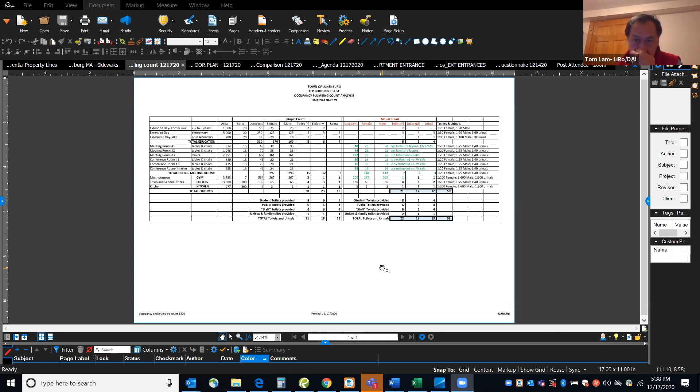So let me do the screen share. I just want to - we made adjustments. At the end of the meeting we emailed the spreadsheets to the committee. And then let me just explain how we came up with the plumbing count, and I'll make this quick. I mean, I'm just joking, not too many people are excited about this stuff.

So we started with a building code analysis, and then determined the number of occupants based on the building code. With that information, we separated into 3 areas: one is the extended day programs, another is the grouping of meeting rooms, conference rooms, and town offices, and the third category is the gym, which we call a multi-purpose space.

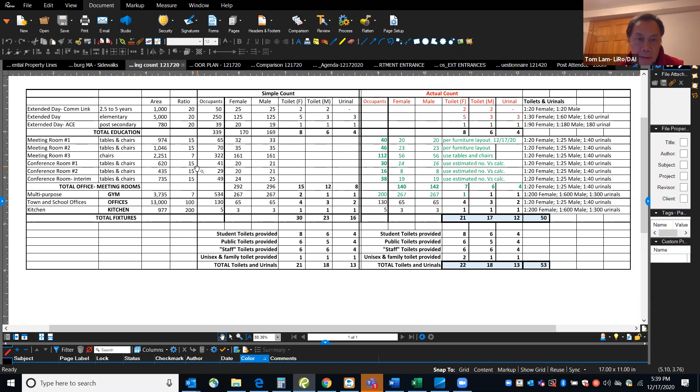Based on the information, this is just showing the process of how we came up with things by going through detailed numbers. With that analysis, different use groups have different occupancy loads. So based on the areas that we developed during schematic design, we calculated the number of occupants.

To make life simple at this time, we're saying it's 50% male, about 50% female. So under simple counts, we started with the number of occupants and subdivided into male and female. Based on the Massachusetts Plumbing Code, we figured out how many toilets and sinks are needed, which are the easy numbers. Toilets take more space, so our focus is really identifying how many male and female toilets and urinals there are.

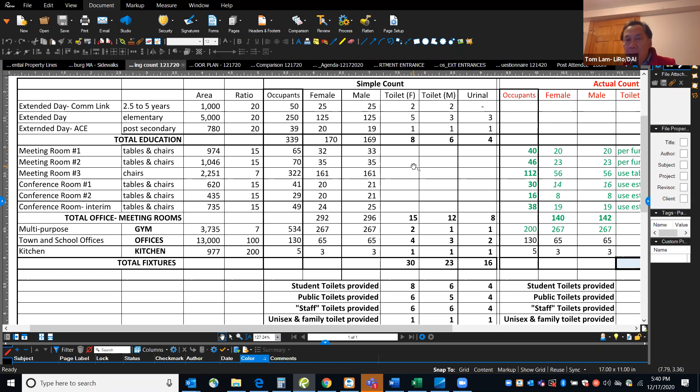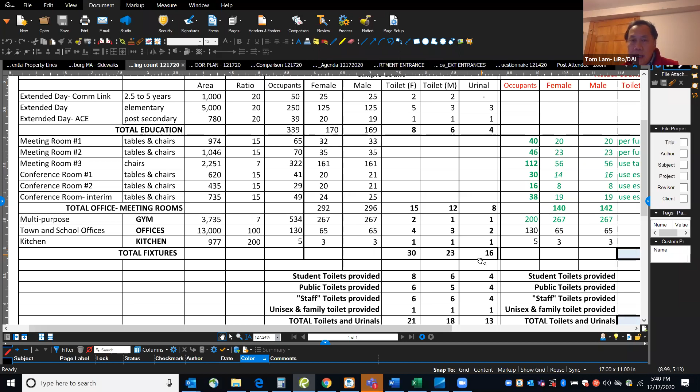So quickly coming down to the bottom, for the whole building for this project, we come up with: we need 30 toilets for females, 23 for male, and 16 urinals. This is based on a straight mathematical calculation of number of occupants from the code.

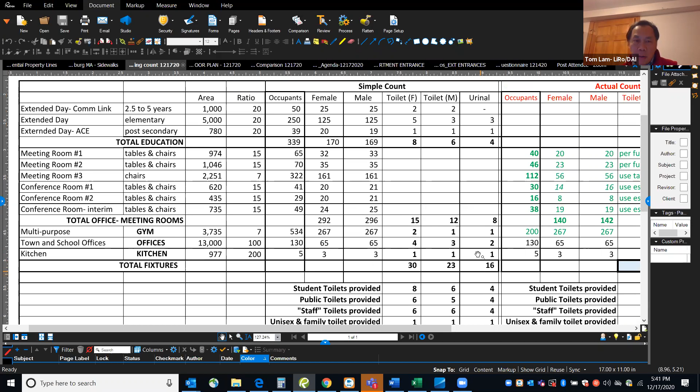If you look at the calculations for the meeting rooms, I can imagine fitting 65 or 70 people in the small meeting rooms, which is only about 1,000 square feet. But from the building code standpoint, this is what it tells us. For meeting room number 3, the larger conference room, we're using the worst case scenario, which is actually standing room only at 7 square feet per person. So it's going to be 322 people, which is really a lot.

So if we're just using that, we come up with a lot of toilets. Granted, I don't have any stocks in plumbing fixtures, it's just a little crazy. Based on what we showed in the floor plans during schematic design, we can come up with only about 21 female, 18 male, and 13 urinals. So this is not going to work.

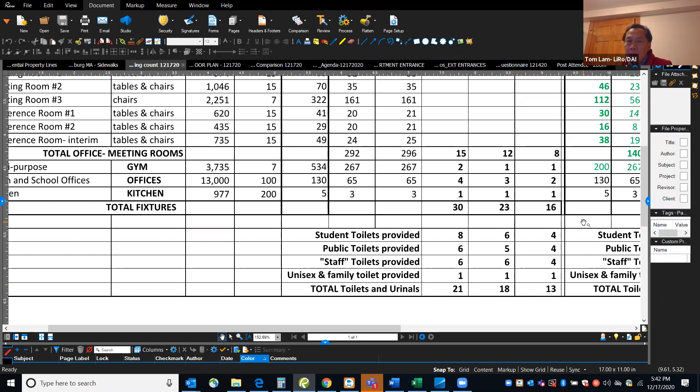So the next step that we do is a quick layout of the conference rooms and meeting rooms. We did some preliminary layouts and tried to fit as many chairs and tables as reasonable and practical. With that, we reduced the occupancy count, and as a result, we reduced the number of toilet fixtures. At this point, we are plus or minus 1 fixture for each count, so we can make that work.

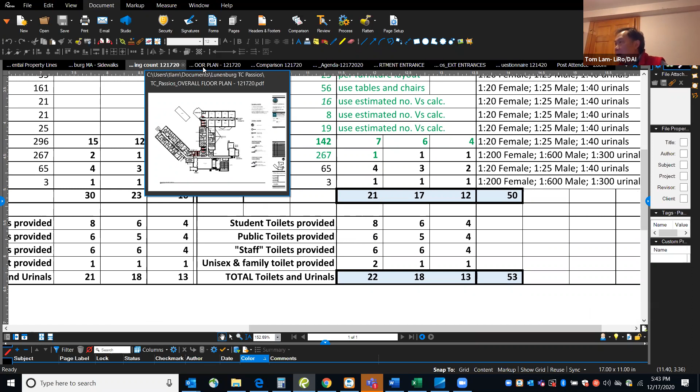So now I'm going to switch to the floor plan, unless you have any questions about this chart. This is more showing our thought process to come to where we are proposing as far as the number of fixtures. Why don't you keep going, Tom, and we'll do questions after you finish the section.

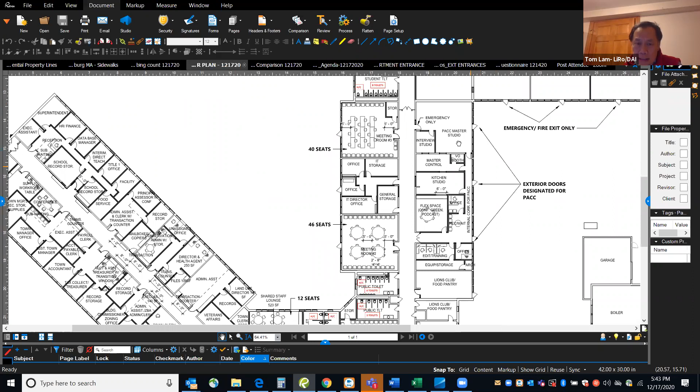So let's start from the front of the building. For the large meeting room number one, we did a quick layout with chairs, assuming there were discussions about a stage, but we need some sort of a front area. So we allocated 8 feet of clearance space, assuming there's some sort of a ledge or border between the platform or stage, whether permanent or portable, and we allow 5 feet between the first seat and the edge, and 5 feet in the back. We come up with about 112 seats with this layout, just jamming seats and chairs next to each other.

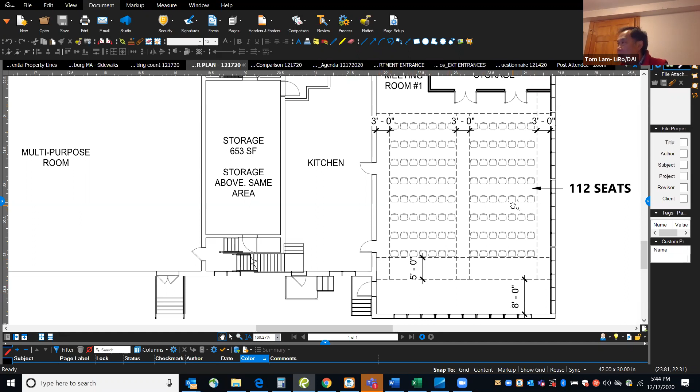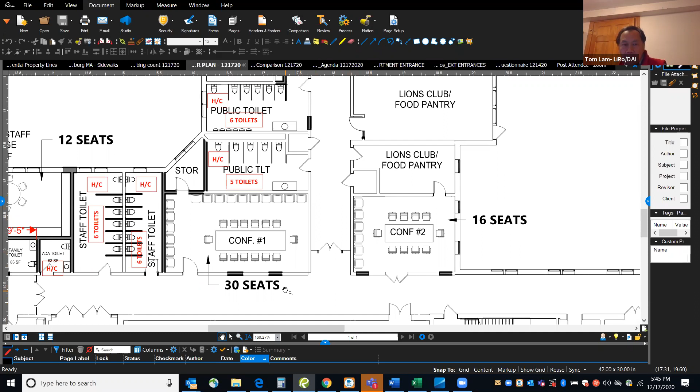Then the next set of layouts is the 2 smaller conference rooms. We thought it's a reasonable layout to have tables in the middle and fit as many chairs as comfortably possible. So we come up with 30 and 16 seats.

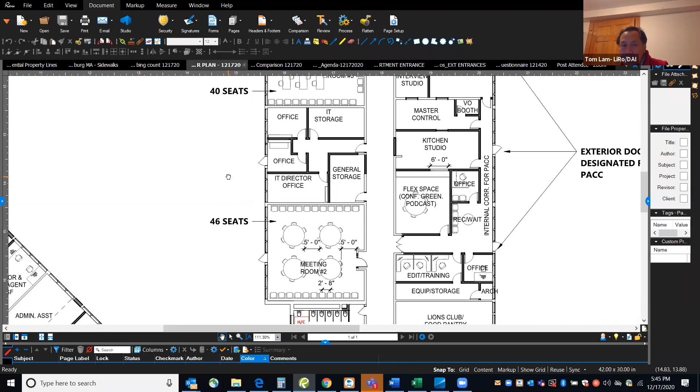Then for the 2 meeting rooms, we had 2 separate layouts. The first is, what if we have round tables? We can fit 4 round tables and chairs in the back on both side walls, and get to 46 seats. Another layout uses pretty standard 6 feet by 2.5 feet portable tables, with chairs on both ends, and we come up with about 40. We probably can increase the number of seating.

This is just to do some preliminary layout to see how many seats we can fit, and obviously we can use round tables here or change the configuration. Then the other conference room in the calculation is the town clerk or interim conference room. Again, we're using 1 long table with potential seats on 3 sides, so that's about 38 seats.

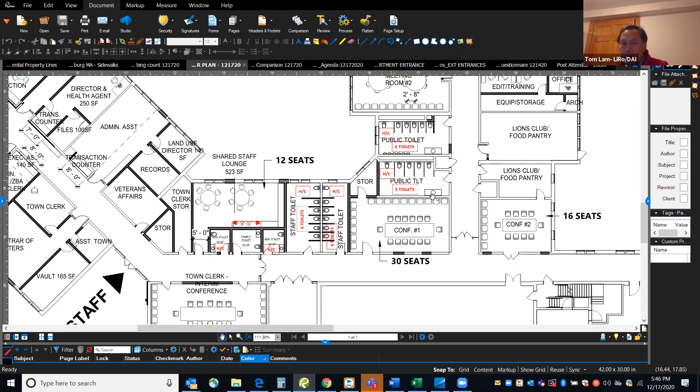With this arrangement, we are still using the same locations as what we have shown for the toilets. So in the past, we have shown 2 public toilets next to conference room, above conference room number 1.

And then there were also 2 toilets which we designated as staff toilets on the left-hand side of conference room number 1. So the new things that we did the last couple of days was we created a series of unisex toilets, including a family toilet. Obviously, we can put the family toilet closer to this side, but I just want to show that we have the several group toilets and then some individual unisex toilets.

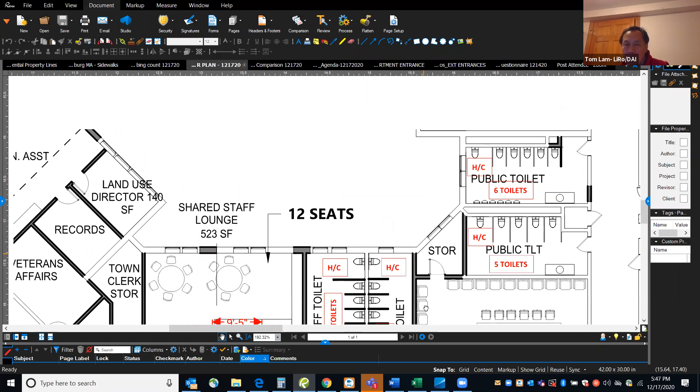These unisex toilets are handicap accessible, and in each of the group toilets, there's also a handicap accessible stall. The last toilet that we have is for the students. Again, we didn't show doors and stuff, we just want to do a quick layout. So we got to have 6 on one side and 8 on the other, and there was also an additional toilet in the ACE room.

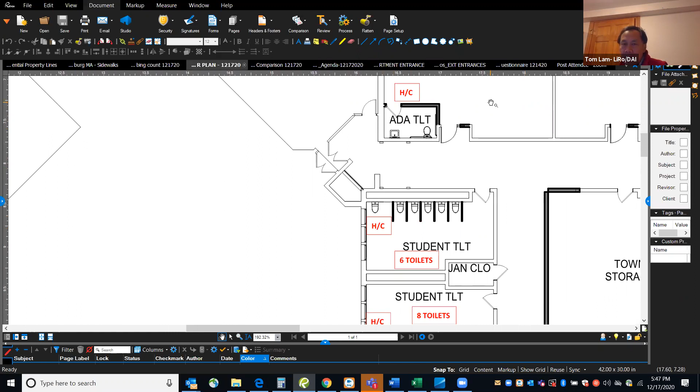So that's pretty much what we have done as a follow-up to a lingering question since the end of schematic design about the different toilet locations and configuration and so forth.

Okay, maybe I'll just, if it's appropriate, Tom, maybe we'll just see if the committee has any questions. Is that okay? Is that all right, Tom, if I open it up for questions? Yeah, please, please. Okay, so I'm just gonna poll the audience one at a time, if that's okay. Why don't we start with the top of my list here, Dave Passios, anything? No, I'm good at this point.

You know, there was some concern that we had too many toilets, but it turns out we needed a handful more. And this configuration looks pretty good. And I like the unisex toilet and the family toilet distribution. That's something we were missing before.

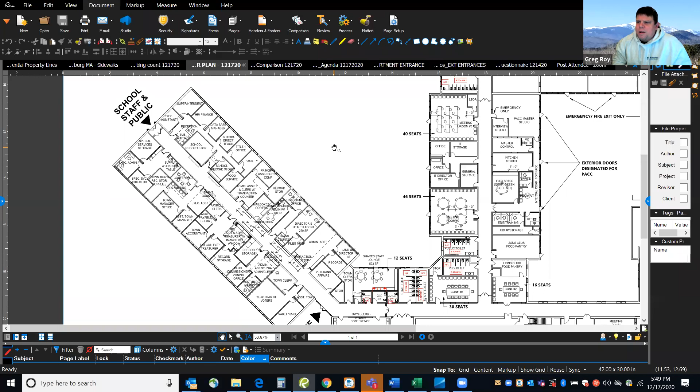Okay. Brian, would agree with Mr. Passios. It's good to see the family toilet listed there.

The only thought I had was in the staff toilets. I know currently the layout is very similar to that, where the sink is kind of further away in there, and I didn't know if that is a potential to move - if that's a low cost move to have a typical sink kind of near the exit or near the middle. I found it weird that it was always towards the furthest inside of the bathrooms.

Yeah, we haven't got to that level, so we haven't really placed the sinks yet. So we will. Thank you. Definitely we might have to move the door. I mean, the last thing we want to do is have some people open the door and look at things they shouldn't. Let's study that a little bit more. Sure, I understand.

Okay, Dave Blatt. I'm all set, Mr. Chair. Okay, I appreciate the analysis. I think

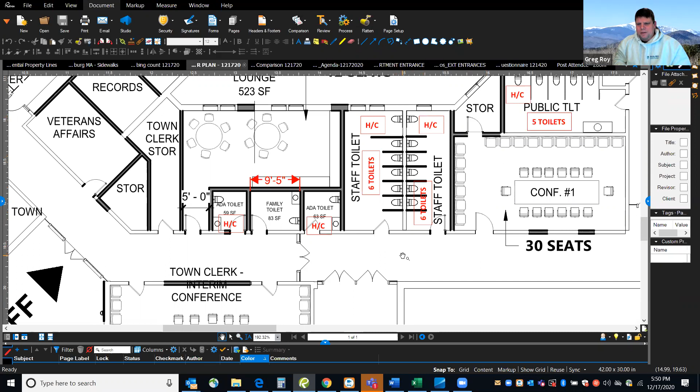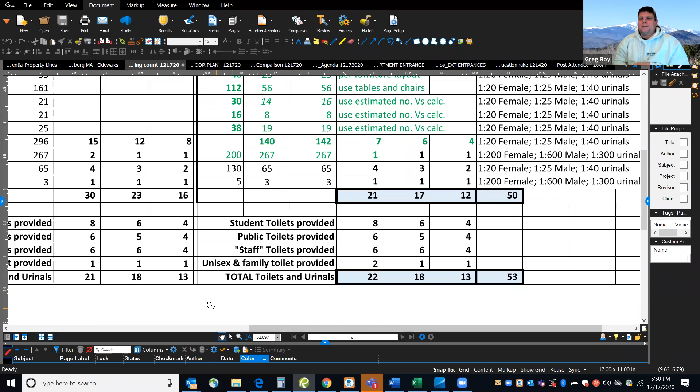There's in these kind of analysis, there's theoretical, there's what's required by code, and then there's reality. And I think it's going to be pretty low probability that we have all 5 conference rooms functioning at the maximum level with all the students in the building at the same time and all the staff in the building at the same time. So I think the analysis of trying to get it down to a reasonable level, to the extent that you guys can do that through the code and what's allowed by the regulations, is in my opinion a good one, because I think that in reality, the max use of the building is not likely to be at the maximum combined occupancy of all uses.

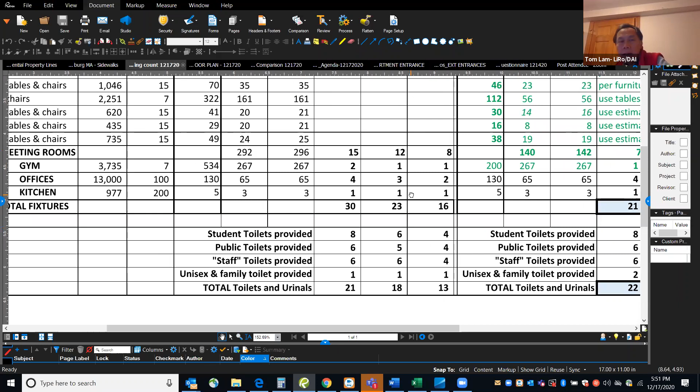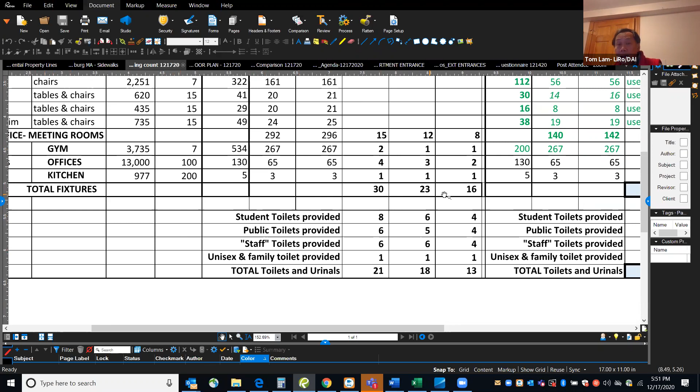Yeah, and the other thing I didn't mention was the gymnasium. Based on the calculations, you can fit 534 people, just standing room only, which I think is a little crazy. And the way that the plumbing code is categorized, it's 1 toilet per 200 occupants.

A sign would be required to put in some of these rooms saying maximum occupancy is such and such, so that legally there is some sort of protection that you can put not more than 200 people in the multi-purpose room or the gymnasium, because that will drive a certain number of counts. And for our purpose, doing schematic design, doing design development, putting a number together, the key thing is to figure out how many fixtures we have, because each fixture has a certain cost associated with it. So, yeah, looks good.

I'm sorry, Mr. Chair, on that note, can I ask - do we really want a urinal in the family toilet? We'll take care of that. All right, thank you.

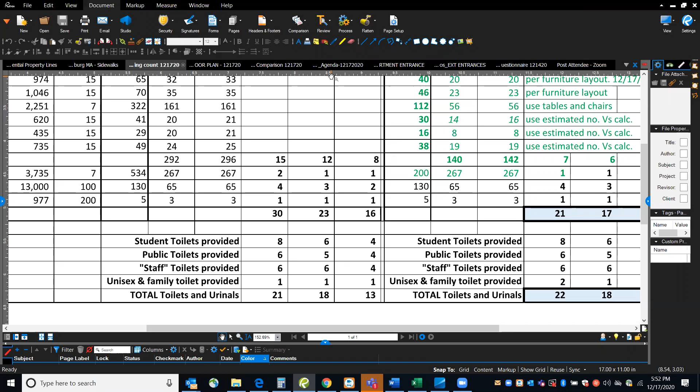I could. And actually, we haven't really placed the urinals properly. No, I understand, I'm just thinking about a little 5-year-old boy trying to reach that urinal, just to prove he can. I have some comments on that, Dave, but I'm going to withhold.

Okay, go ahead Tom. Okay, this next one is just a quick follow-up to a conversation we had a couple days ago, and we did some more research on the different flooring types, primarily VCT, vinyl composition tile, and luxury vinyl tile.

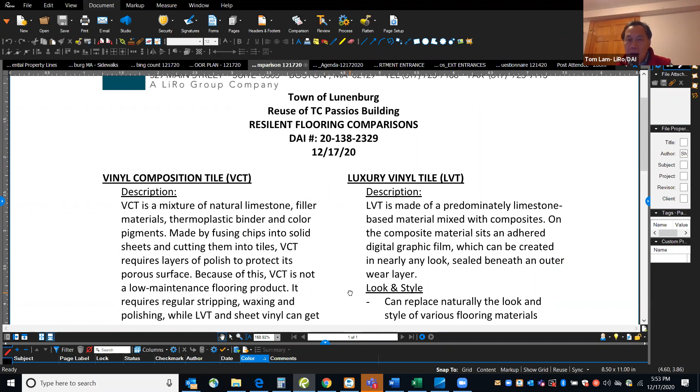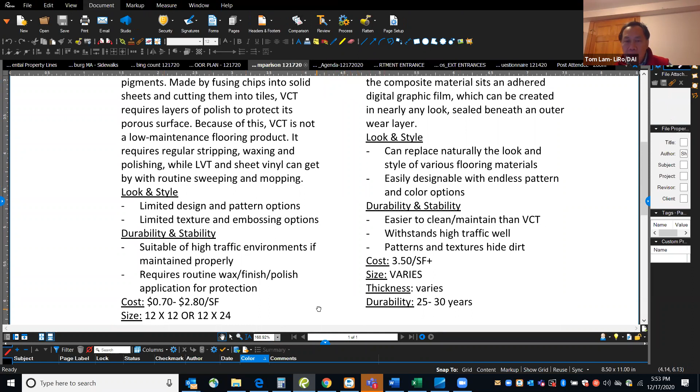This is general information. We talk about pros and cons, durability, general cost information, and general size, and then we have a couple of examples as far as the cost range. So we won't need to go over this tonight, but if someone can't sleep tonight, that's a good piece of paper to read.

I'm going to move on to things that I think are a little bit more exciting, some of the design ideas. So I'll look at the departmental entrance first. I still remember in one of our interviews or the first project kickoff meeting that it's important to have some sort of identity or signage.

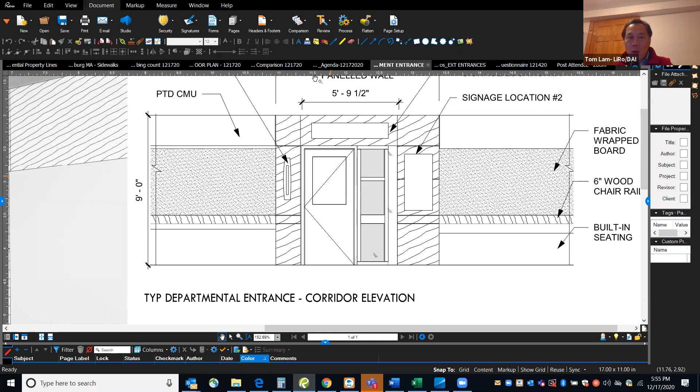In front of the wall, we're going to put these wall panels, which are a couple of inches thick, and can have the look of wood, but aren't really wood panels, just to highlight the entry and create some sort of a portal look.

On one side, we're proposing some sort of wall sconce more as a decorative element. We also have opportunities to either put signage above the door or signage on the other side of the door to say this is the town manager's office or the assessor's office.

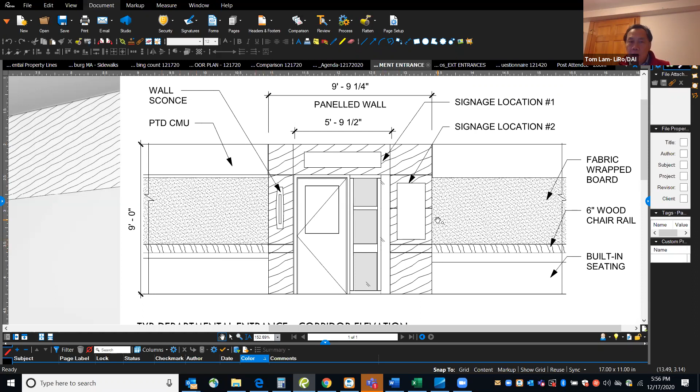Along both sides of this door, or possibly the entire duration of the corridor, we can put some sort of railing at the 3-foot height, and at the door height put a fabric wrapped board so that if there's any notices they can be pinned to it, just to create an opportunity for display.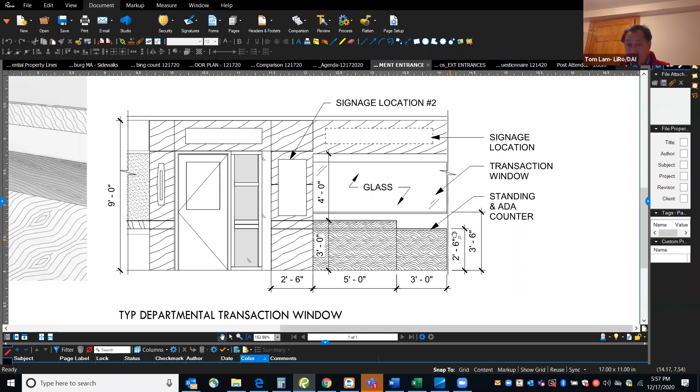Because of ADA, the transaction counters are typically at 3'6", but then we have a lower counter for wheelchair access, which is at 30 inches or 2'6". The image on this 3D image is a view of that typical departmental entry.

The other thing we're thinking is to have some sort of an accent floor just to highlight that there's something coming up in the hallway, because it's a pretty long corridor going down to visit different town offices. So, any comments?

Yeah, you want it? Let's do it. Same order, Dave Passios. Yeah, I was just thinking as you were talking about this, we had discussed that there had been some desire from some departments to have sliding glass versus stationary glass. I think pretty much we as a committee said we felt it should be stationary.

Have you got any additional feedback on that from any departments, or have you not had time to pursue that yet? We haven't pursued that yet. We had two meetings since Monday, and Matt Morrow and Karen Prochu, they don't have a need for sliding windows, so I just need to get back. Okay, great, thank you.

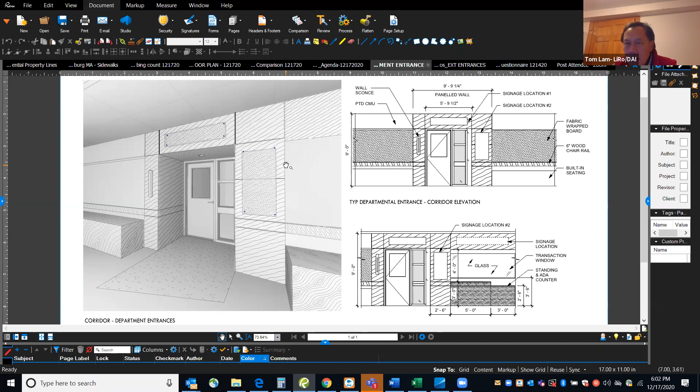I like it. Yeah, actually there's another value engineering option, and that is instead of using these panels, which you've seen in new building developments and residential developments—they're starting to use these panels—so it's somewhat similar products, and it's pretty cost effective.

But another way to achieve the same look, instead of having these panels, we could have another layer of drywall with metal trim to still create the same effect, with a different color of paint. That will drive the cost down.

One of the things we would do as part of due diligence is have a menu of choices. So if the overall budget for the project is high, we might decide before we even go to a town meeting that, as much as I like to use the Hardie panels, we just want to be responsible and prudent when it comes to the budget.

So we are taking the same concept to the outside, which is creating panels and identifying— one second, Tom, I see Dave has his hand up.

Go ahead, Dave. Yeah, it was just triggered by what Tom said about different colors possibly. One thing I think is going to be very advantageous is as the public enters the corridor headed towards the town offices from the main entrance, we're going to want something posted there—I don't know exactly where—but a key that gives them a heads up: number one, they're headed in the right direction for town offices; number two, it gives them an overview of what department is where in that hallway, kind of a roadmap.

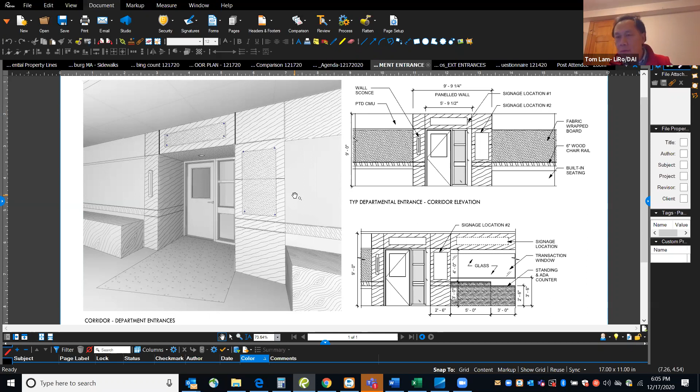What we can do is have accent flooring that may not be primary colors, but we can have muted colors or something that works together. So it may not be a bright green, but maybe a greenish tone for one department. Or another possibility, if we're not using these panel systems and use drywall, maybe the portals would be a different color. The good thing is, at this level, it's not going to change the cost of the project. It's still a color of paint, or it's still the same amount of accent flooring.

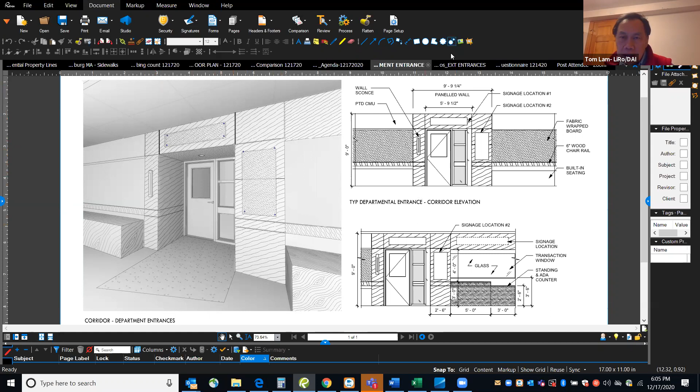So again, trying to carry the same theme to the outside, which is wall sconces, using signage as an architectural element, and using panelization to signify an entrance. At the main entrance, we can use wall sconces similar to the ones inside, so there's continuity between the exterior and interior. And if we're using the panels we talked about, we might highlight this and put the name of the building down.

Looking at some other entries, this image on the lower left is the entrance coming in by the current cafeteria area. We can use the same paneling system wrapped around above the door and bring it down, then again use the wall sconce to create continuity, and possibly put signage above the door.

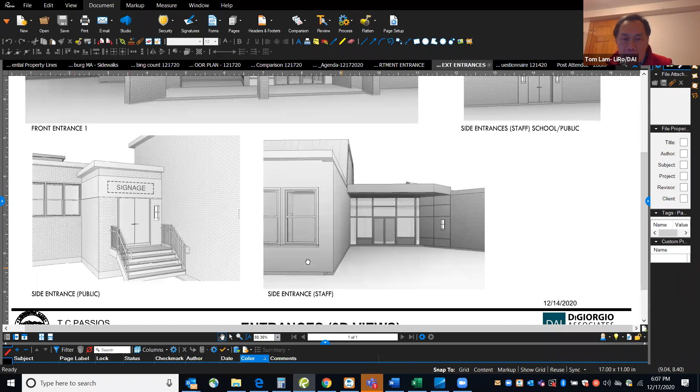This entrance is next to the main entrance. This is a staff entrance, with an existing roof parapet. What we can do is bring a panel system down from the edge of this roof to the existing glass, and again use a wall sconce as an element that repeats itself.

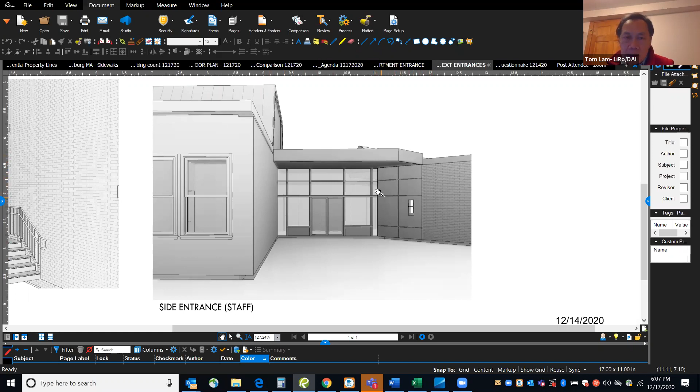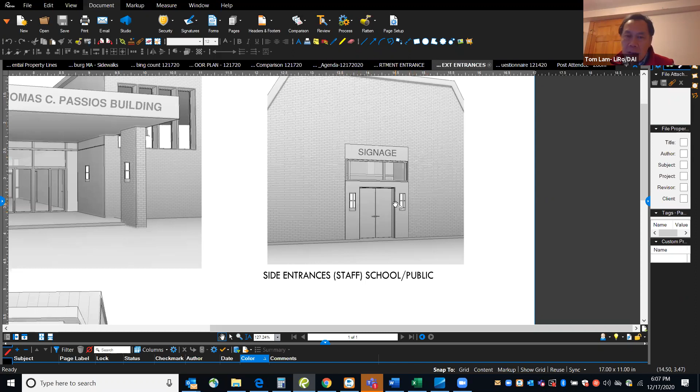Last but not least, there's another entrance in the back, where the extended day program will go. Again, we can use that panel system above the existing window, and a couple of wall sconces, one on each side of the door, to create some cohesiveness and tie the whole building, both inside and outside, together.

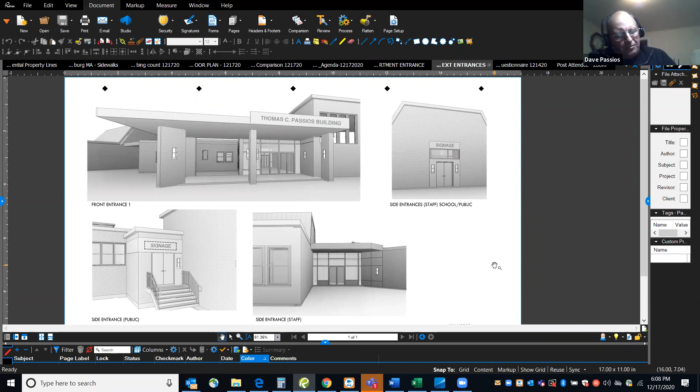Go ahead, Dave. Yeah, just a quick question there. There's an entryway at the far end of the town offices hallways where the school department is going to be. Would that be similar to the side entrance? Yes. Okay, thank you, that's all I needed.

Anybody else on that? Brian? Okay, and Dave, just a quick one on that. Is there much cost difference between a solid door and a door with half a window? I don't know the difference, but I can get that information. You hate coming to a door when you can't tell who's on the other side, especially if they're locking doors or opening up into somebody's face. Yes, that's something we will look into, especially for these egress doors, we should at least have a sliver of glass.

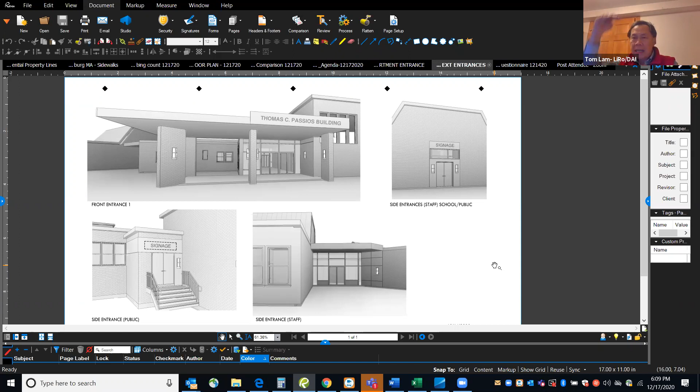And the other question is the side entrance staff—is that where we're talking about the school department, or is this part of that front lobby area side entrance staff? It's part of the front lobby. Do we really need a separate entrance for staff then there? I would look at the way we put the parking—I would want them to be showing up near the school department if they were coming in as staff.

Let me get the plan. Yeah, I think so, we're gonna—go ahead, Tom. That's an existing entrance already, they're just dressing it up. Gotcha, all right, thanks Dave.

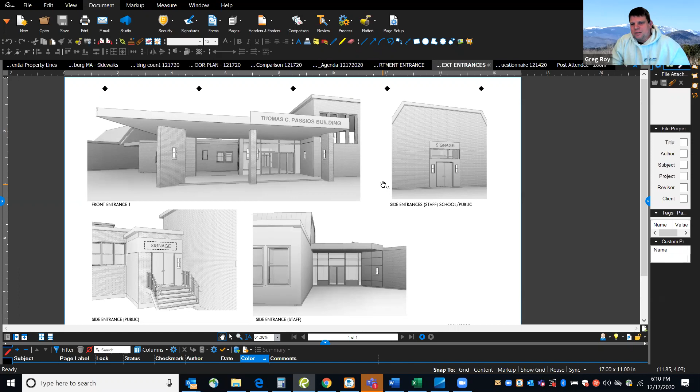Yeah, it looks good to me. I'm all about a cohesive look, as long as we're really keeping track of the bottom line. It doesn't look like you're proposing anything too exotic to me. So I, generally, it looks good to me.

Well guys, can I ask a question then? Do we need that side entrance staff? I know it's an existing door, but do we need it? If we can go back to the plan—I just look at it based on how we have parking, how we are laying this thing out, I would look at that as kind of redundant. And obviously the doors are a huge expense because they have to be safety doors, double doors, and all that stuff. So I'd like to look at that as a separate item and then decide. The only question I would have is required egress, but you have the front lobby anyhow, so okay.

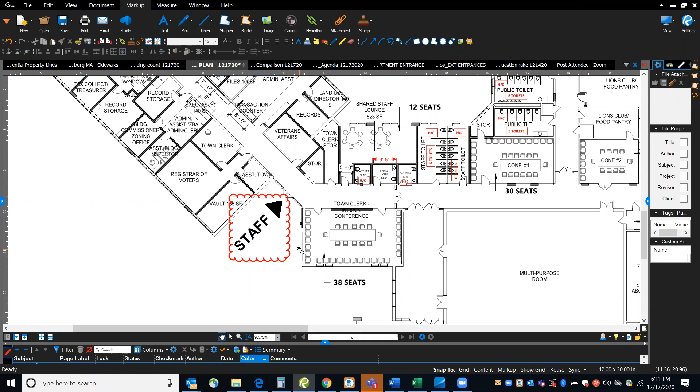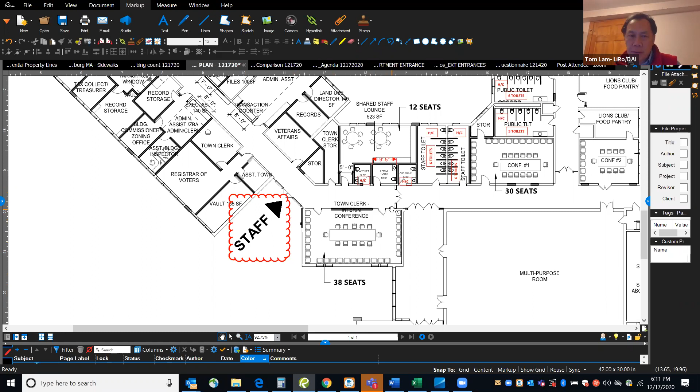If it's just required for egress, we can keep it as-is and not add the wall sconce. We don't need to highlight that, because if it's a secondary or tertiary door, it's not a public door per se, unlike the main entrance and unlike this door.

Where I guess the only question I have is, will there be enough staff parking on that far end of the west wing for everybody to be parking out in the back corner there? I had in the back of my mind that we were going to have staff coming from that side of the building when they arrive in the morning.

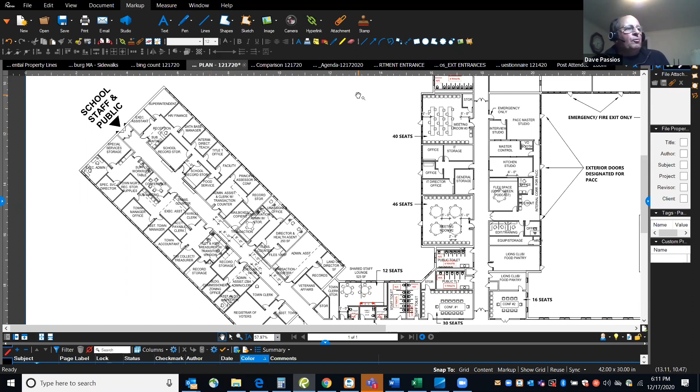All right, like I said guys, as long as it's something we can decide, I just wanted to quickly mention it. Okay, we can pick it up later, Dave. Yep, I agree. Okay, Tom, that's all I have, and I'm going to hand it over to Ed.

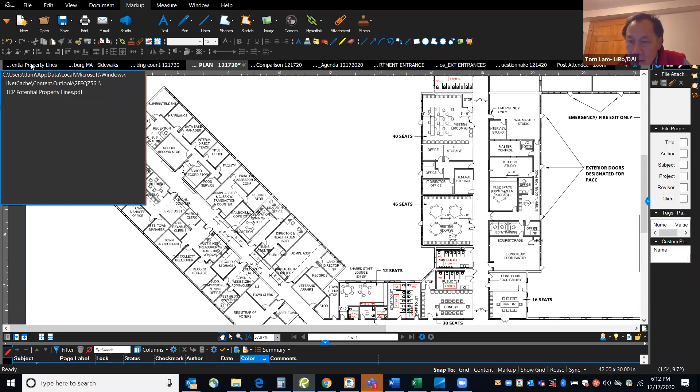Ed, do you want me to show the property line sketch first? Actually Tom, can I ask one other question? I'm sure you guys went over it Monday, but is there a big difference in cost between acoustic tiles and drywall, on the ceiling tiles, the acoustic ceiling tiles?

Yes and no, because there are so many different levels of acoustical tiles. Drywall doesn't absorb as much sound, and since we've been talking about hard floor, especially in the corridor, from the acoustical standpoint that's the difference. But cost-wise, again, I'll get you the information.

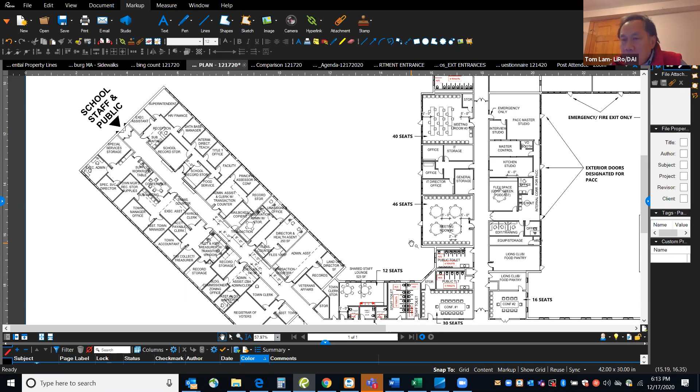I just, especially when you're looking towards the kids' wings and things like that, acoustical tiles don't look good very quickly, you know? It's easier to paint the ceiling. In the rooms or in the hallways? In the rooms and things like that. Yeah, there are so many different levels of acoustical tiles that some look and last a lot longer, but I'll get that information. Okay, no problem, thank you.

And this sound absorption issue needs to be looked at too, because we typically will run the partitions all the way up to the bottom of the roof deck to dampen any sound transmission that may get above the ceiling, so it's not going from one room to the next. Right, okay, all right guys, that was it for me.

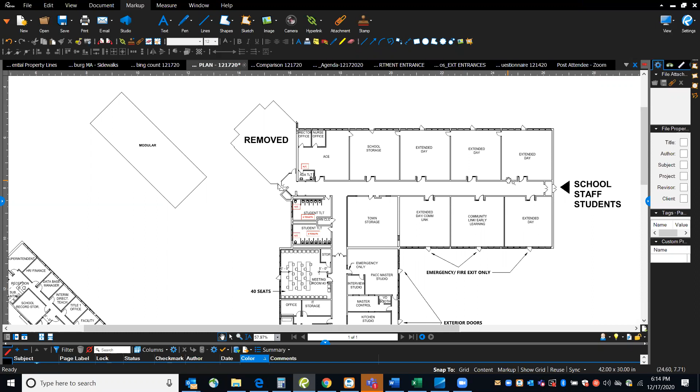I'll let Ed take the stage since he's already wanting to. So one of the questions the committee had on Monday was, is it possible to subdivide the TCP property to have its own property lines? Our civil engineer Meridian looked at that and provided the sketch, and the quick answer is yes, adding property lines is not a problem.

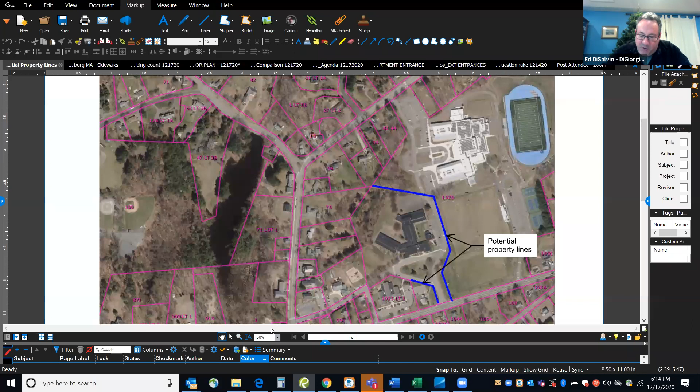What needs to be considered is that right now, between the middle school, the high school, the building near Mass Ave, and the TCP building, it's all owned by the town. To subdivide that would involve getting the town's legal side involved, because it would mean creating easements through the property for utilities, drainage, roadways, and determining who would own each piece of property. So there's a fair amount of legal work that would need to be done to subdivide the property and give it its own property lines, but the answer is yes, you could do that.

Okay, great. Yeah, so I don't know if there were any other questions on that. That was the question that came up Monday, we just wanted to provide an answer to that.

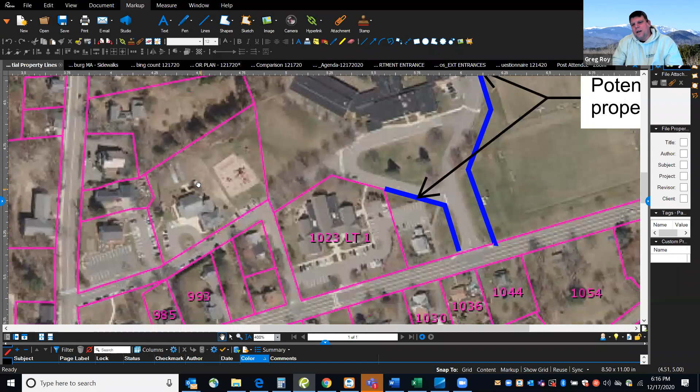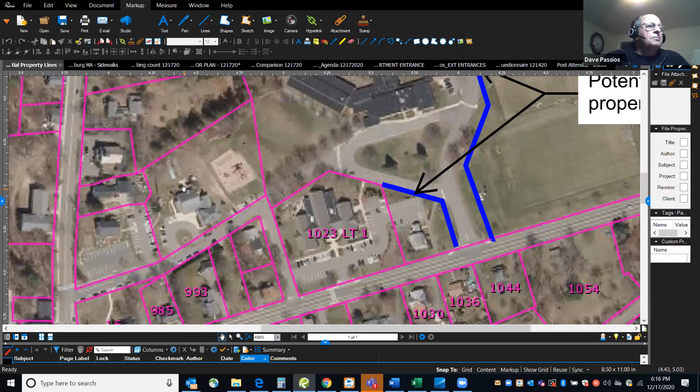Yeah Greg, I've got one quick one. Go ahead, and I know this isn't set in stone, this is just potential, but I'm thinking that the line that separates off the Brooks house, that's got to be a non-conforming lot, and you can't create a non-conforming lot, can you? You can, even if it's the town? No, I think you can do that. You can put a property line between two structures that exist prior to a certain date. I'd have to look that up. It's an 81R, section 81R or something like that. Yep, that may be what they're doing there, Dave. Okay.

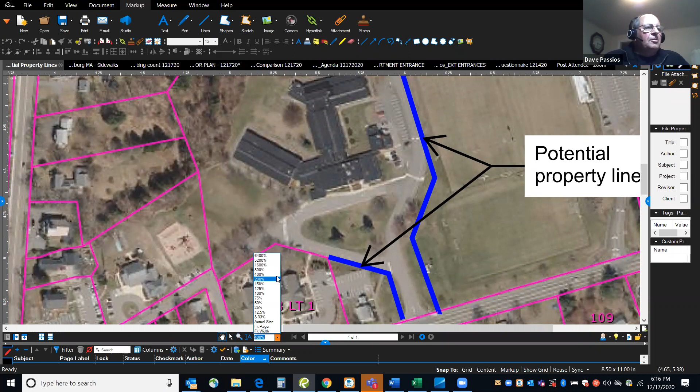So now, I'm assuming that—again, I've looked at so many town meeting articles from multiple years—but the article that turned the Passios School back to the Board of Selectmen, or back to the town, mentioned a portion of the overall school property being conveyed with the building. So I'm guessing either Meridian hasn't approached the town to see if there was actually a drawing or plan as to what portion was to be transferred. Usually when an article says 'a portion of,' it's documented somewhere, just not in the article itself.

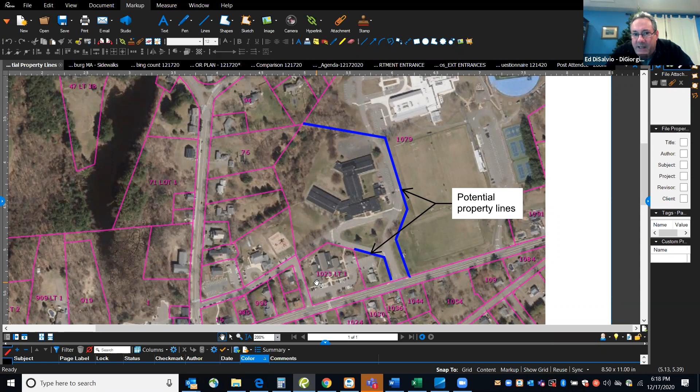I've never been able to put my hands on a document showing a lot already existing for this property. When Meridian did the land survey, they identified all the property owners surrounding this parcel, and the 12 acres they surveyed is just listed as owned by the town of Lunenburg. It wasn't differentiated any other way—all the land within that survey boundary is all town property, with no subdivision within it.

I think there was a line, Dave. But it was a line drawn in pencil, not in ink, if you know what I mean. The one line I remember was 8 or 9 feet off the foundation of the east wing or north wing, off of that gravel parking lot where they put the fence. Yes, that's what it was.

And truthfully, I think we did it—we may have done it for town meeting, but we definitely drew a line when we were working on the middle high school project, to define the project limits for the MSBA. But I think that might have been used in part in the conveyance article you're talking about.

The gaps that occur every time we talk about this are sufficient enough for my memory to lapse every single time. But I've seen sketches of that—I'll try to dig those up for you, Dave. That's fine. Nothing was ever formalized or recorded, so it's a moot point, really.

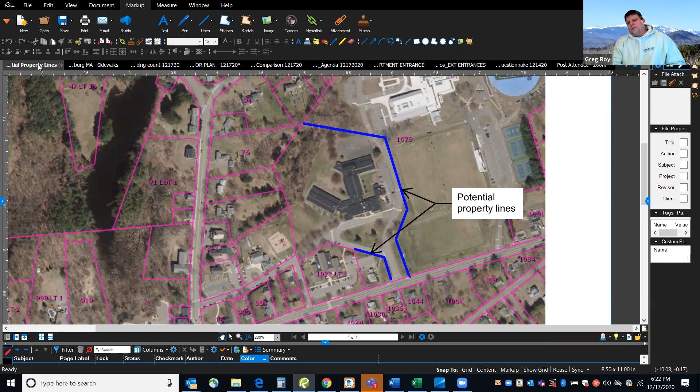We had a discussion on Monday regarding where the limit of work should be delineated. Our answer was generally, let's try and limit the work to only what's required to make the project compliant and to provide the required access from the new features from the site to the new building, and let's not try to add things that are not specifically related to that.

As I thought about that a little bit more, I thought I better poll the audience. So I sent an email to both Heather and our DPW director on that. And our DPW director, particularly when it relates to paving and things, actually thought it might make sense to include the pavement in the project.

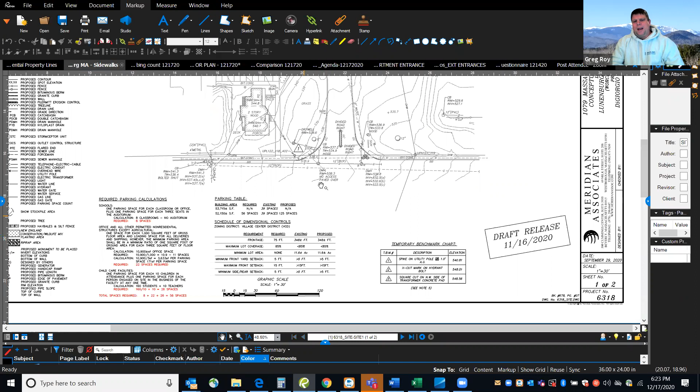For example, the through road from Mass Ave all the way through to Oak Ave is new pavement. So it might make sense, if we're going to be paving certain portions where we're adding parking, to pave that loop or the triangle, so called. Because in his view, you'd hate to do this whole project, not pave it, and then come back to the town in 3 or 4 years after you get the CO on the building and ask for money to pave something, when everybody's going to ask why the heck didn't you just do it with the project.

Right, right, so I guess I see that opinion. I just offer that as a little bit of a follow-up from what we said on Monday, that I did look into that in a little bit more detail. Well, that makes sense.

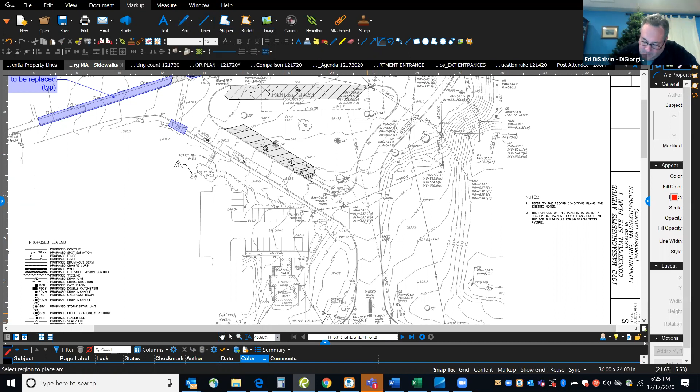So based on that, we can start our cost estimating at Mass Ave, go all the way up the driveway to Oak, and then take care of the triangular roads right around this parking that's being shown on the screen. Well, to be clear, so that's all done, the through road is new pavement, so you probably don't have to do that.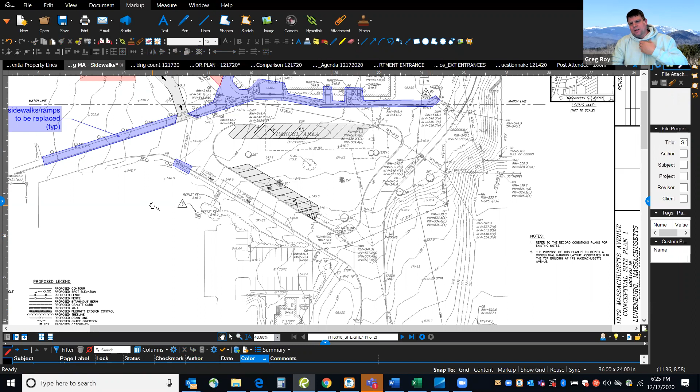I don't know if any other members have any other comments on that, and we can let Ed talk and then we can discuss it. Maybe I just wanted to give you that input, Ed, before you started. No, that's very helpful.

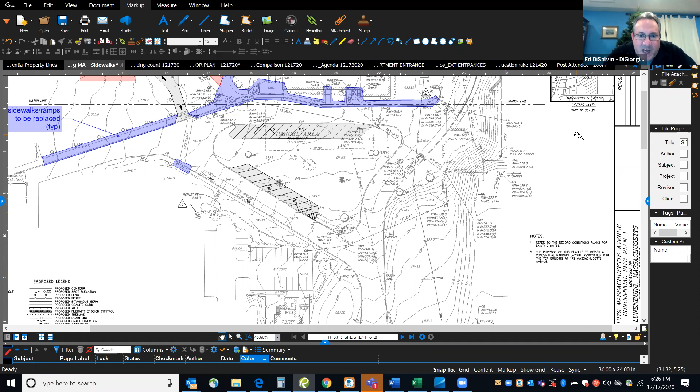Thank you, Greg, and we appreciate getting the grant information for the sidewalks being done. That work doesn't quite reach where we are here. So this again is from Meridian, showing, based on their field observations, the sidewalks around the building and in front of the building that they would recommend being completely replaced, removed and replaced, which are the blue. And the reddish orange colored shaded sidewalks are going to be removed and not replaced.

Based on the new design of the west wing, we're eliminating all of those back doors, so there's no need to keep all those sidewalks. We're recommending removing those now unnecessary sidewalks. And the green that you see there is all brand new sidewalks and ramps getting from the parking areas into the building.

So they're proposing all of this work will be built into our final report and the cost estimate. And then we can add in what you had just mentioned, the paving out front, the two legs around the triangle, any associated paving with the front parking, and all the new paving for the parking that wraps around the west and north side of the building.

Again, I'll open it up for questions, comments. I'll go the other way this time. Dave Blatt? No, looks good to me. I like the idea of getting rid of all those sidewalks around the building.

Yeah, okay, I guess I had one question. The green pad in the kids' wing, what is that for? Is there an entrance there, or is that just to get to the existing sidewalk? I think Tom, is there a door back there on the north wing?

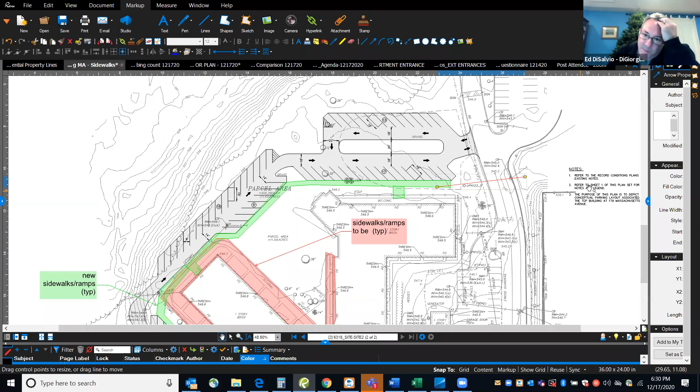Yeah, because there's a sidewalk on the other side of that road. I don't know, if that means we have to spend an extra $10,000 on handicap ramps when not necessary, then maybe it's not a good idea. But now that I'm thinking about it, if we did that, we'd have to put a handicap ramp on both sides—we'd have to redo it, put a curb cut on each side for the ramp. So yeah, maybe I talked myself out of that.

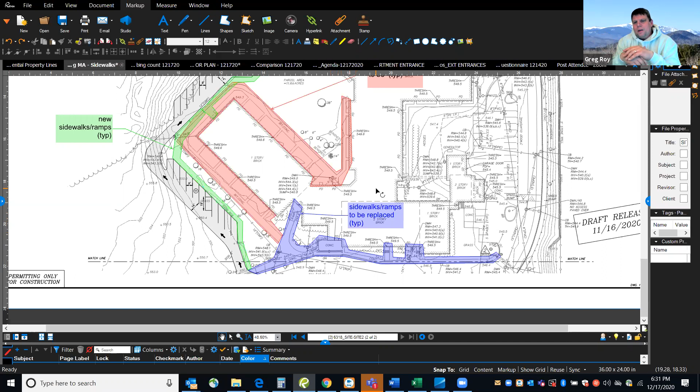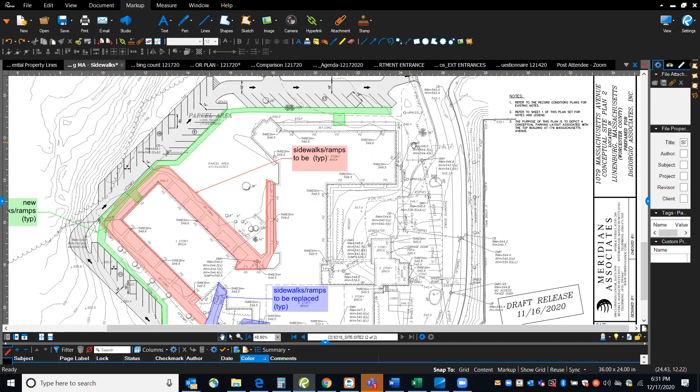Mr. Chair, based on your comment about the sidewalk on the north side, where you were talking about towards the high school—maybe we should have that far corner at least connect to the sidewalk towards the front, towards the door. This way, if you were picking up or dropping off, you wouldn't walk across the grass, you'd walk quickly across there. Do you understand what I'm saying, guys? Yeah, I do. That probably does make sense.

And truthfully, I think we should maybe talk about the connection to the high school, because people park there for big middle high school events, parent-teacher nights. People are going to park there and be walking to the high school. It might make sense to do that. I don't know.

It would mean popping some granite on the other side of the street where the existing sidewalk is and putting in a handicap ramp, so it's something to think about. It would definitely improve the circulation pattern through the whole site. I agree. Yeah, we'll have Meridian add that. Yeah, I think it makes sense. It's one of those things—if we have project budget issues, we could probably VE it out. Okay, great comments.

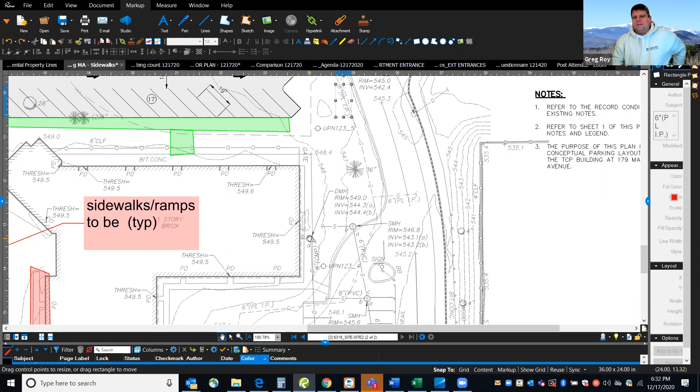I think that was it for me. I guess I'll say out loud that I agree. I think that replacing the sidewalk in front of the building—that sidewalk's pretty rough—I think it'll give it a nice, clean, fresh look.

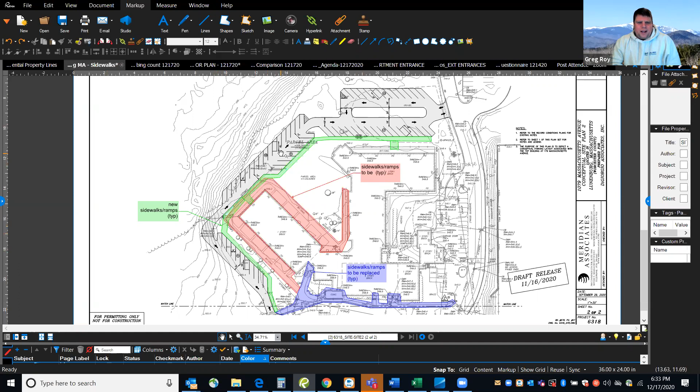And then the only other question I had was about the new parking we're proposing adjacent to the building, right there. That's set pretty far off the building. I know there's some nice trees there, but I wonder—this is in the front portion, the angled parking on the southerly side of that wing, right in there—if it made sense to shift that parking, sort of put the sidewalk where the existing one is and shift the parking closer, but I know there are some pretty nice trees there, so.

I think in our previous discussion those trees were staying. Are they still on the plan? Those trees along that wing, are they still on the plan there? Or am I seeing it wrong? I guess if you did what I'm saying, you'd probably have to take those trees down, which may not be advantageous.

But be that as it may, I think you're gonna find that working on that slope, to get the parking in the location they're showing it, is gonna be problematic. That's probably something we can determine as they go through that detailed process.

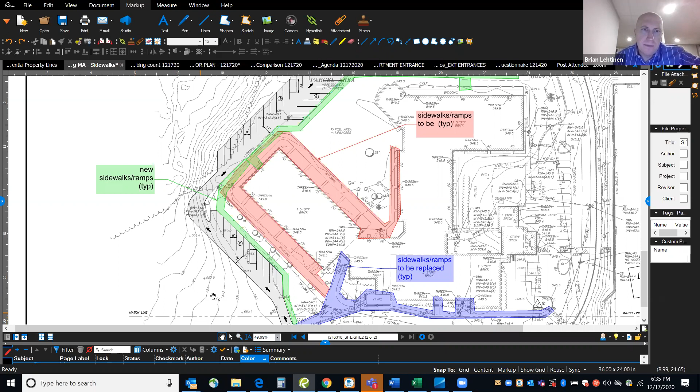I wondered too whether it makes sense to just take out those first 5 parking spots so you're not digging so much into that hill. Or the last 5 - that's where you got the biggest elevation change. Yeah, it's right on that corner where you're making that turn.

And just cut the corner sharper. Or actually less sharp, with a bigger radius. But they'll figure that out, I'm sure. That's just a comment.

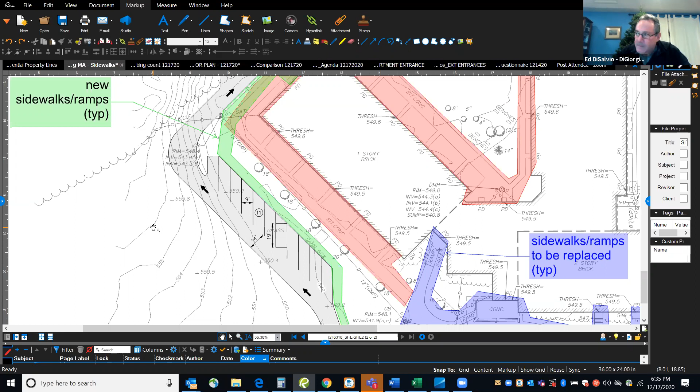The last item I just wanted to update the committee on was the traffic study, the results of the traffic study. As you may know, the traffic study looked at 5 intersections around the TCP building as well as the parking.

Our traffic engineers worked in conjunction with Meridian on the parking analysis as well. The 5 intersections we looked at were Mass Ave and Lancaster Ave, a signalized intersection; Mass Ave and the main driveway by the Passios building and the middle school; the Memorial Drive and school driveway intersection; a driveway on the east side off Mass Ave; and Oak Ave and the school driveway.

Those 5 intersections were looked at not only from a traffic count standpoint, but also from existing conditions and ADA. The report found that sidewalks, where they exist, are in poor condition and should be replaced, and many are not ADA compliant.

Some intersections have problems where there's no sidewalks, and the stop signs and signage are not in the right location. The recommendations are to improve these intersections by replacing sidewalks, making them ADA accessible, relocating signage to better control traffic, and adding sidewalks to make it safer for the public to walk into the property. I won't go into every detail, but those are some highlights on existing conditions.

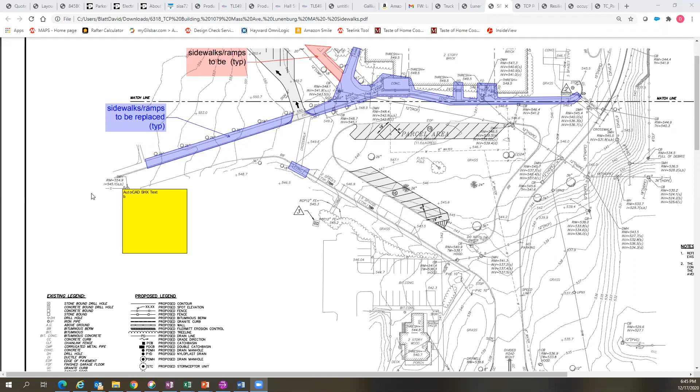If we did that, I would try to make these roads more one way. These two roads - you can only come out there and go straight towards Memorial Drive, towards the senior center, and you couldn't go left. Or only come in. Maybe we want it to be one way into the facility.

Then I'm worried about this intersection right here. I see what you're saying - I got somebody coming in, I got somebody turning. Maybe I'm overthinking it, but I wondered if there should be stop signs at that crosswalk going from both directions, so people are stopping at the crosswalk and allowing people to turn.

It'd be interesting to get their opinion on that, Ed. I'm sure the traffic engineers will consider it, but I'm a little concerned if we shuffle that around too much that we have unintended consequences further up towards the senior center, either heavier traffic going out or whatever. I compare this to the street I live on in the center of town - if we give that option, the driveway across the front of the building is going to be like Whiting Street, avoiding the center of town, and that's what I wonder. It would be great to see what the traffic consultant thinks - whether it would be a detriment or a benefit. It'd just be another data point.

My sense is that I agree with Dave - I think it probably will, it definitely could create more headaches offsite. I don't know if that's why the gate's always closed too. I don't know if we can get any information from the DPW or the town on why the gate is constantly closed - maybe they have a reason for that.

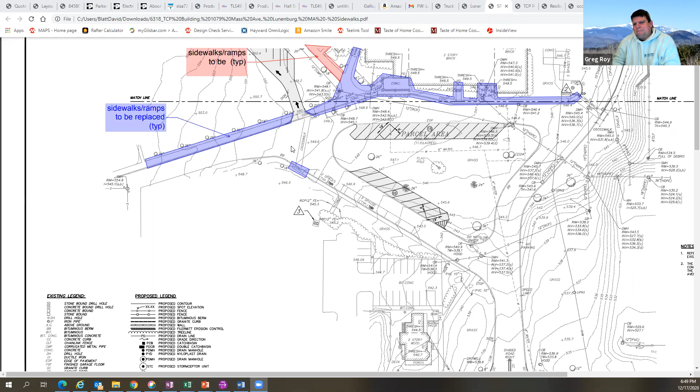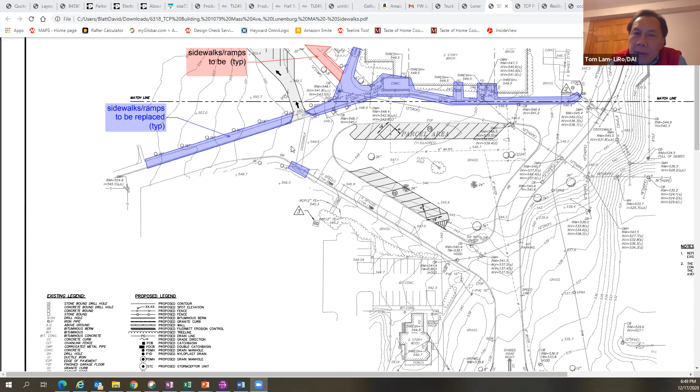I'll speak on the architecture side - I think we have enough, and as we're putting that together, I'm sure there'll be more questions, but it's not something that will slow the process down. We've already started that process, so when we meet again, if there's any questions or clarifications, we can discuss then.

Yeah, and I think we've got enough information after our discussions tonight about the civil site work to keep going with that. Okay.